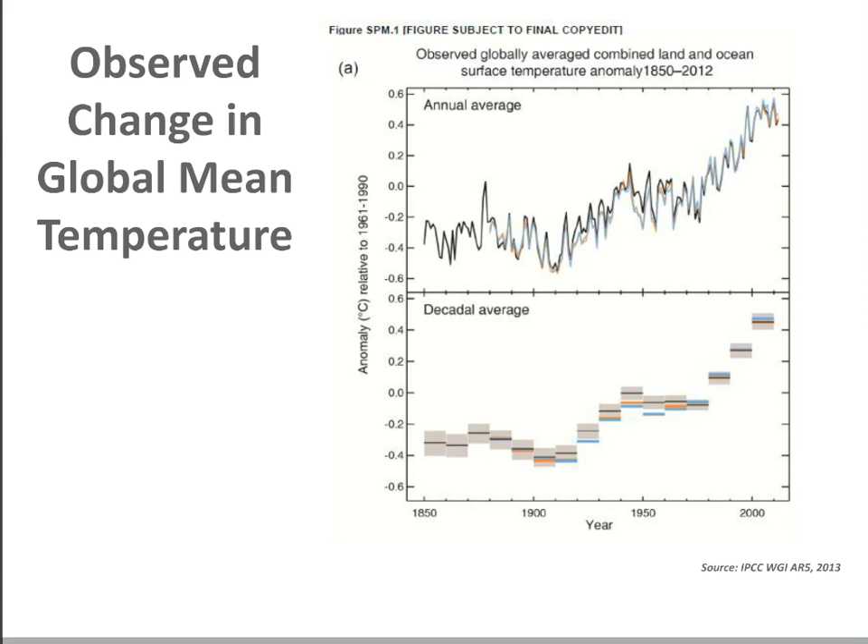You can see in this graph of observed change in global mean temperature from 1850 to about 2010, on the top half of that graph, average annual change in temperature has been rising steadily. And there's been a lot of talk from people saying, oh, the last 10 years have been flat, we're not seeing anything. You can still see that it's been increasing even if you look at those decadal averages.

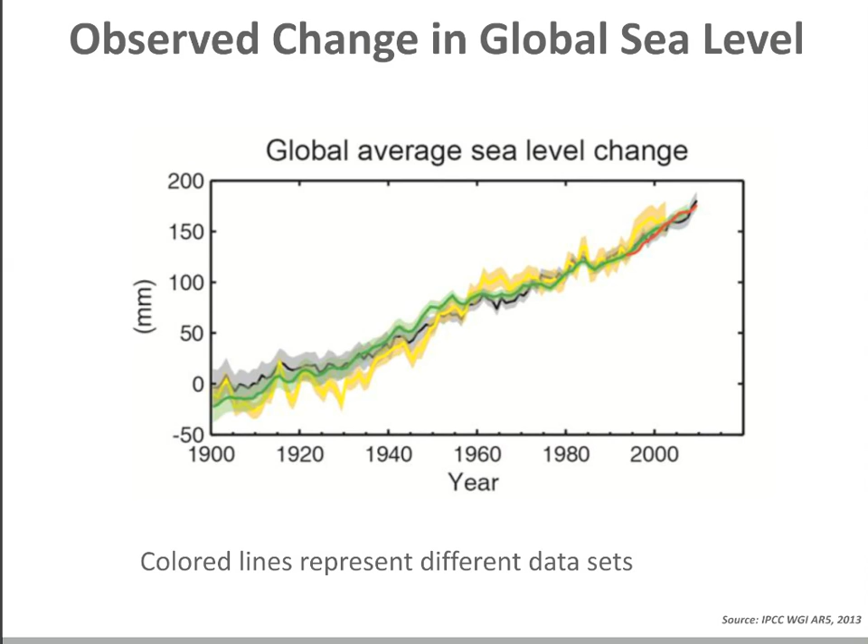If we move on to sea level rise, same thing. Multiple data sets are represented in different colors here. You can see from 1900 through 2010, a pretty steady increase in sea level rise. So, climate change really is happening. I believe it's anthropogenically caused. Most of the scientists in the world also believe that. But there's a lot less certainty in terms of what are the future projections. How is climate going to be changing? And there's a lot of uncertainty around this at many, many different levels.

There's uncertainty on the emissions scenarios. How much greenhouse gases are China and India going to be emitting, or are they going to go green? There's uncertainty in general circulation models. There are many scientific centers around the world that have put together climate change models, but they model the circulation differently. Temporal scale, whether you're looking at the very near term versus 50 years out, 100 years out, there's a lot of uncertainty in that. The variable examined: there's quite a bit of certainty in terms of how much sea level is going to be going up, but much less when it comes to precipitation.

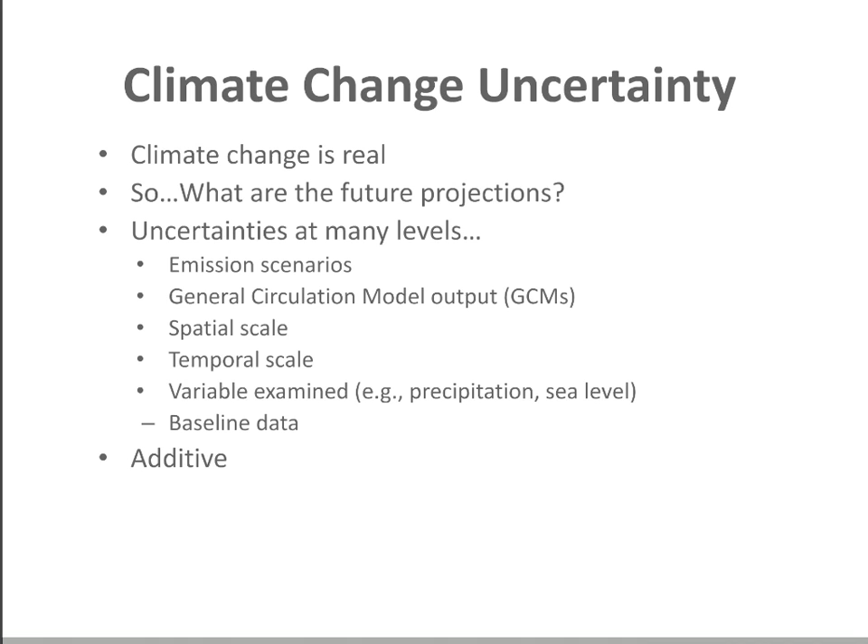And then as Chuck is going to talk about later, in baseline data, there's a lot of variability, whether you're taking averages over an area, whether you're looking at a site-specific location, that type of thing. And I should mention that all these are additive. So these uncertainties build on each other. So in terms of spatial scale, there's a range of projections at every spatial scale. On the global scale, the uncertainty really comes from the emission scenario, whether China is going to be exploding or not.

And in addition to that, how much the temperature goes up when you double the CO2 or other greenhouse gases. And then at the regional, local, and site-specific scales, you also get a lot of variability just because these global models don't really take into account a lot of the local processes, the topography, or in a local setting, which side of a lake you're on, or in a site-specific, maybe there's a urban heat island effect. So each scale has its own set of uncertainties, and this increases with the higher the resolution. And I've kind of gone over those last 2 points there.

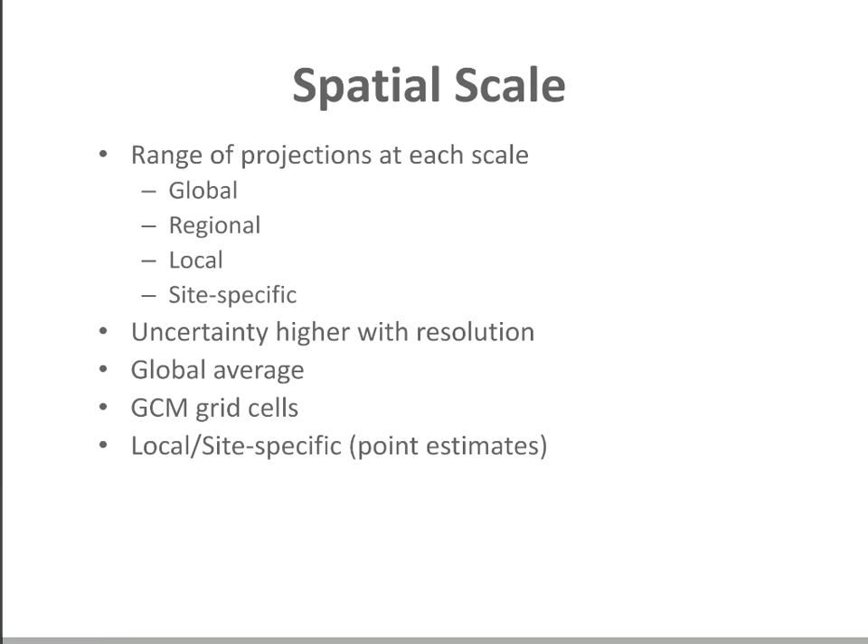The climate variables examined. So as I mentioned, there's a lot more certainty in terms of temperature than there is in precipitation. But also in terms of the type of event. Are you looking at long-term averages, or are you looking at extreme events? This kind of goes at, well, what's important in terms of building? Are you interested in looking at the average annual changes in maximum, minimum, or mean temperatures, or are you more interested in looking at that 24-hour maximum event?

Also, the length of the event. Maybe it's something like the number of days above 95 degrees Fahrenheit that you're interested in, or the average number of days without precipitation. So these length of events are also important. And also the recurrence of a threshold event. So maybe it's really that 100 or 500 year flood or heat event that you're interested in, and you're curious to see, well, how is that going to be changing in the future?

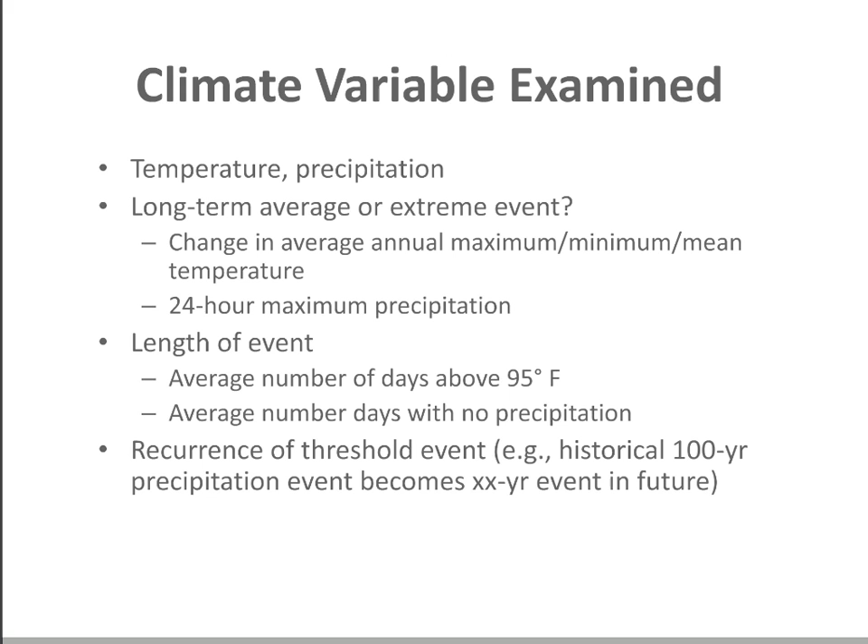So how we handle climate change uncertainty, you really need to answer questions that are pertinent to the need that you have. What is it that makes a difference in terms of buildings? What are the variables that are important? Is it that threshold event, or is it the long-term averages? And what kinds of risks are you willing to live with? Are you willing to say, well, most of the time we're going to see climate change in this way, but we're not really all that concerned about those outliers? Or maybe it's, no, it's really those big events. Living here in Boulder, we had the big floods this year. That was a watershed event that we were very concerned about.

What is the time frame that's important to you? Is it, you're looking 1 year out, 10 years out, 20 years out, 100 years out? Need to keep that in mind. And then, how important is the site-specific location? Are you interested in designing buildings for one specific location, or are you more interested in the regional area? So that's one way to kind of get a grasp on the uncertainty.

Another way here is to pick GCMs that do a better job historically in your area. So some climate models will do well in, say, one part of the country, but not well in another part. So you can kind of hone in on getting a possibly better estimate looking historically at how that model has done in your area. But you do have to keep in mind that just because a model did well historically doesn't necessarily mean that it will project the future equally as well.

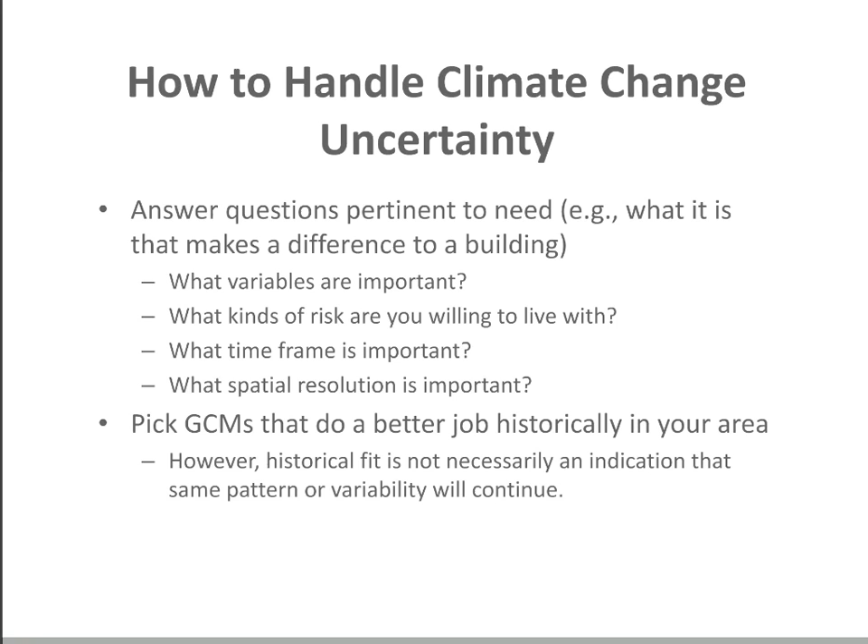Another way to handle uncertainty is to examine the range of climate outputs and to bound your estimates. So in this case, maybe you pick a high emissions scenario with a really hot, dry model, and you look at that one. You also pick another one that's a cool, wet scenario, and maybe a middle of the road scenario, so that you try to bound what is the range of uncertainty that I'm going to be looking at. And that allows you to know the potential range of the outcomes.

Another common technique that people use is to take averages across a variety of models. And these seem to do quite well in terms of hindcast in projecting past climate. But a couple issues. One, as I mentioned, it's not necessarily an indication of what's going to happen in the future. But the other problem is that when you take these averages, it may dampen those tails. So you may not get those extreme events, which could be important to you. And then a third approach is to examine the number of models in agreement. So maybe you're not so interested in those extremes, but you want to say, well, what do the majority of the models say, or what do 2/3 of the models say?

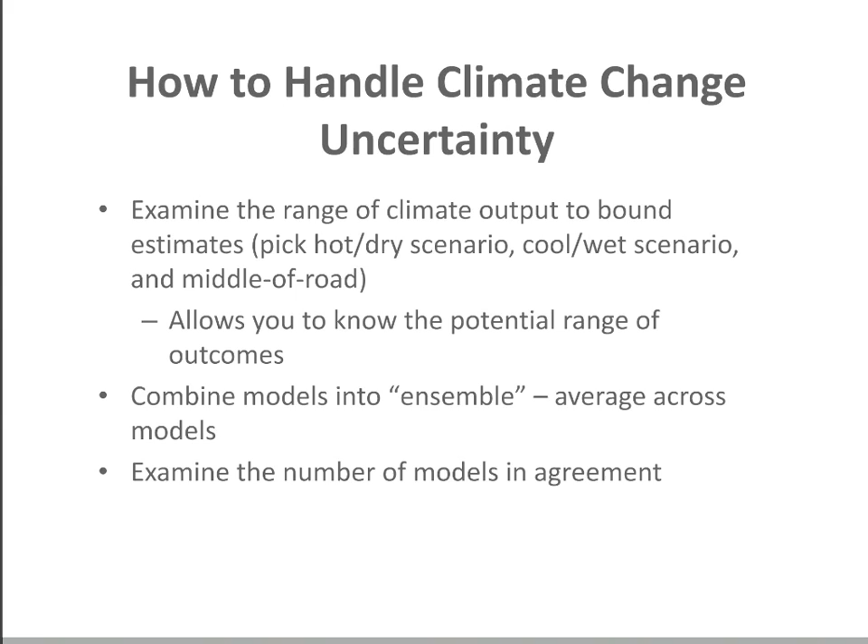So in conclusion, as I mentioned, there's a ton of uncertainty in terms of climate modeling, from emissions, model output, spatial scales, and temporal scales. But really what you need to do is simplify for the variables that are important to you over what time period, and really the level of risk that you're willing to take. And that will help you figure out the types of analysis that you want to do to show you those ranges. And there's a variety of websites out there and applications to help you do this type of analysis. They will put together ensembles or individual model scenarios at different emission scenarios. So I encourage everyone to check those out.

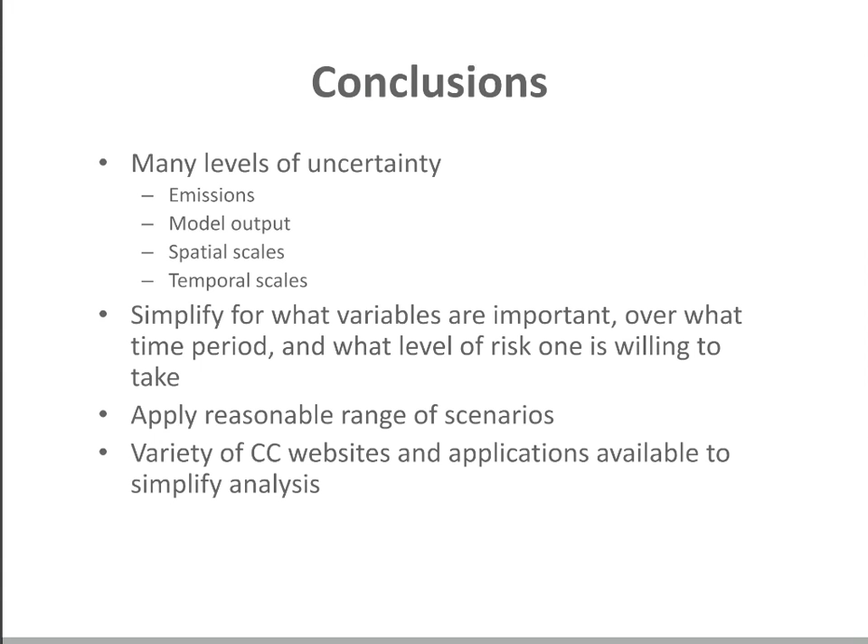We're with a private company, although we do a lot of our own research, and we're focusing on a number of things. But in the case here, the problem that Russ outlined was that while global climate models can add an awful lot of value, the more you want to assess the impact on a particular site, the higher the resolution, the more difficult it is to use the output of these models.

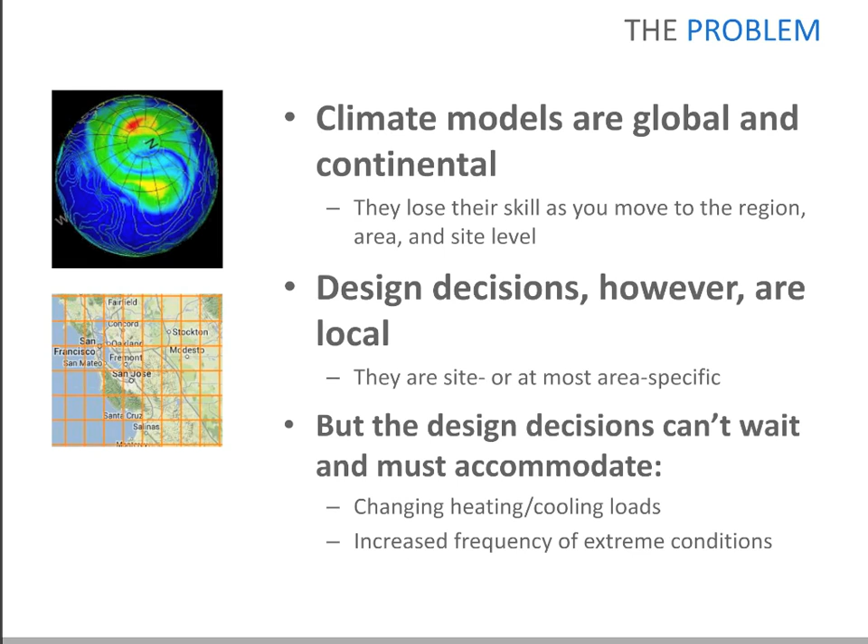The trouble is, of course, that design decisions almost always are local. They are site or small area specific. And while the climate is changing, you actually can't wait on making decisions. You have to find the best way possible to make decisions on how you're going to handle or even estimate what the heating and cooling loads are going to be in the future, and in some cases, even more important, what about the increased frequency and severity of extreme weather events?

What we've been working on since 2009 is essentially digitizing the entire global atmosphere back now 34 years. We've pulled in the best that we could find of all the satellite remote sensed data, all the observed data from the ground stations, plus the model sources that output gridded historical data and gridded forecast data.

We have over 580 variables, full coverage from about 4 meters below the surface of the Earth to the top of the stratosphere, and we've mapped those into 650,000 geostable grid areas, and then spent the effort to clean, rationalize, filter, and stabilize everything so that all the variables are consistent, and so that it is a statistically stable database representing every hour from early 1979 through 7 days ahead for each one of these grid squares.

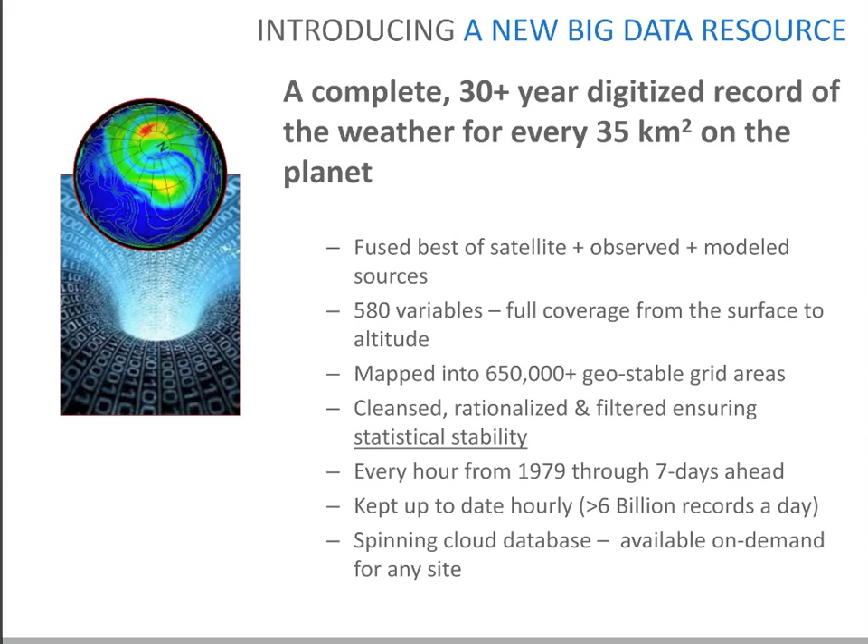Then we keep it up to date. Every hour we pull in all the ground station observations, and every 6 hours all the new modeled output from NOAA. And we've got it all spinning in a cloud database. It is basically designed to take the randomness, the errors, and the sort of esoteric strangeness out of weather data, so you can start putting it into analytic engines and help make some decisions that are useful.

We have built some offerings right now that can help with getting a handle on the impact of the changing climate. If you have your own ability to do analysis, you can get 34 years of gap-free data anywhere in the world. It's consistent place to place, so if you do an analysis in one part of the world, it will be statistically valid in another. And we have that data not only every hour, but also daily averages, mins, max, sums. We even have daytime, nighttime, month, year data to support analyses.

We have built for the energy modeling community on-demand TMY files that are always up to date through the end of the last year. And we've given the options to do them for 30, 15, 10, or the last 7 years. And we're working with a couple of companies to analyze the difference of looking at the typical weather for the last 7 years against the typical weather for the last 30 years and finding some non-insignificant changes. So we're trying to provide those options.

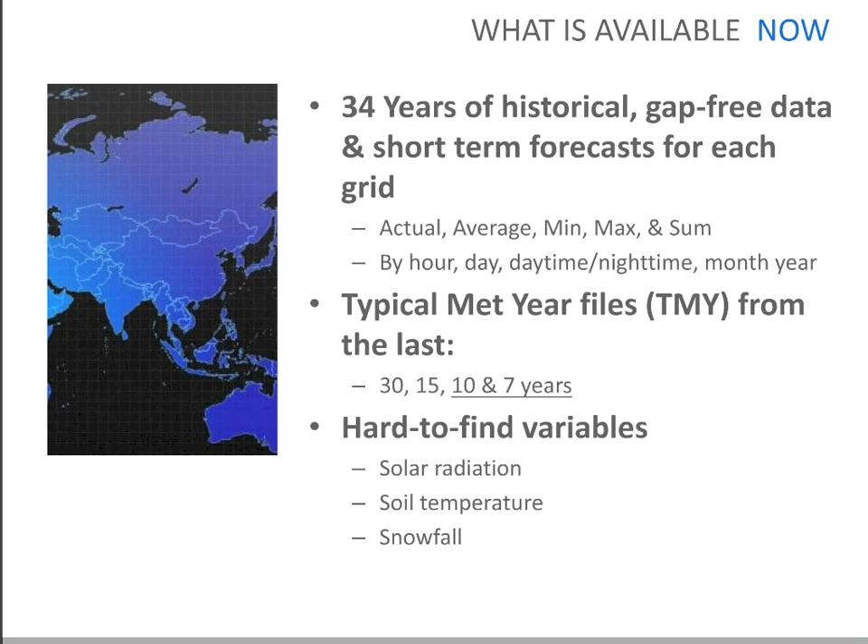We also have the hard-to-find variables: solar radiation, soil moisture, soil temperature, snowfall, ice, freezing rain, and the like. Solar radiation is an important one; instead of having it be estimated from cloud cover, we have the actual solar radiation. What's more interesting is the stuff that we're working on.

Because we build TMY files on demand, we are altering the algorithms that produce them so that we will soon have what we call extreme meteorological year files. In other words, over the last 7 or 10 or 15 years, what were the coldest set of months on record, or the warmest set of months on record for that location, or the wettest, for example.

We have an algorithm for urban areas for converting the typical meteorological year to urban, and as we work down a few points on this slide, as we are working on looking at trending for any variable over the last 34 years, we have the basis for providing future meteorological year files, which would be applying the trends within limits, and then taking the temperature and humidity and the like out 10 or 20 years.

We are also downscaling. The grid system we have right now is 35 by 35 kilometers. Eventually it'll be the entire landmass, but right now we're starting with the U.S. and working on severe events so that you have the data down to 1 kilometer, which is particularly important for measuring the frequency and intensity of severe events.

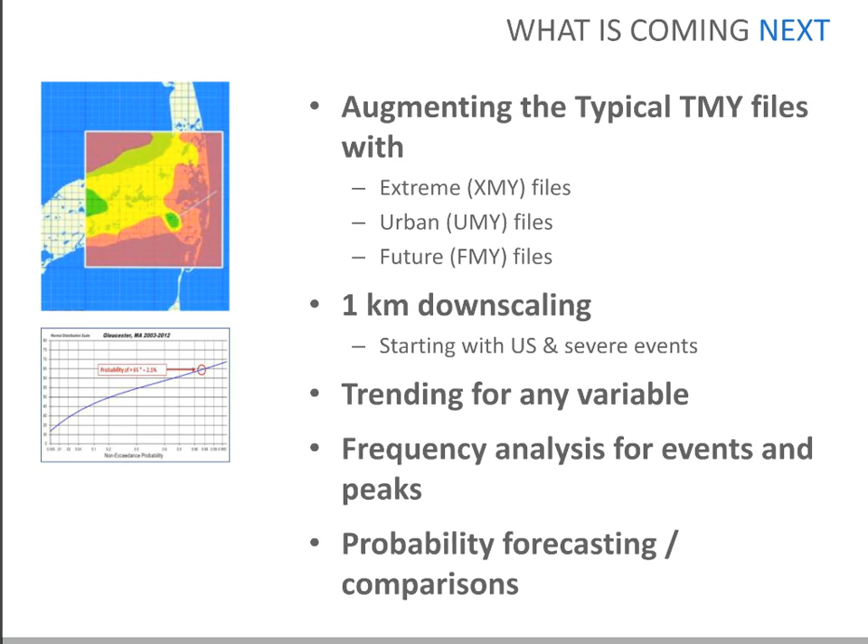That said, what we're trying to do is come up with an additional set of tools to augment the global climate models and other catastrophic models that are out there now that are based on modeling the atmosphere, with kind of a bottom-up approach that says you also should look at what are the exact trends at a particular location, and use both pieces of data in order to make your decision.

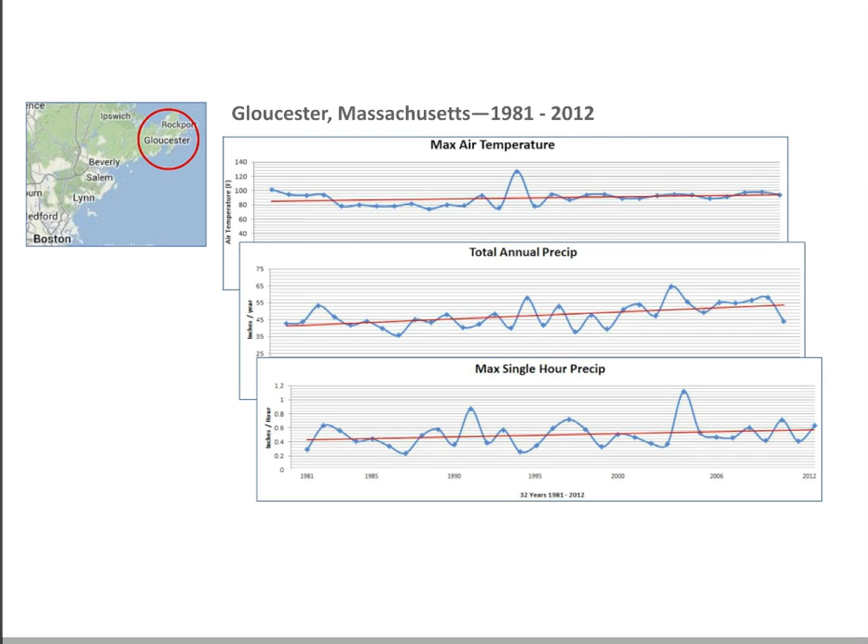These are just a few examples. I just picked Gloucester, Massachusetts to show over the last 30 years that the air temperature is getting slightly warmer there, but the precipitation rate is actually increasing at a higher rate, including the maximum single-hour precipitation. I think the next slide is just the frequency. This one's even more interesting.

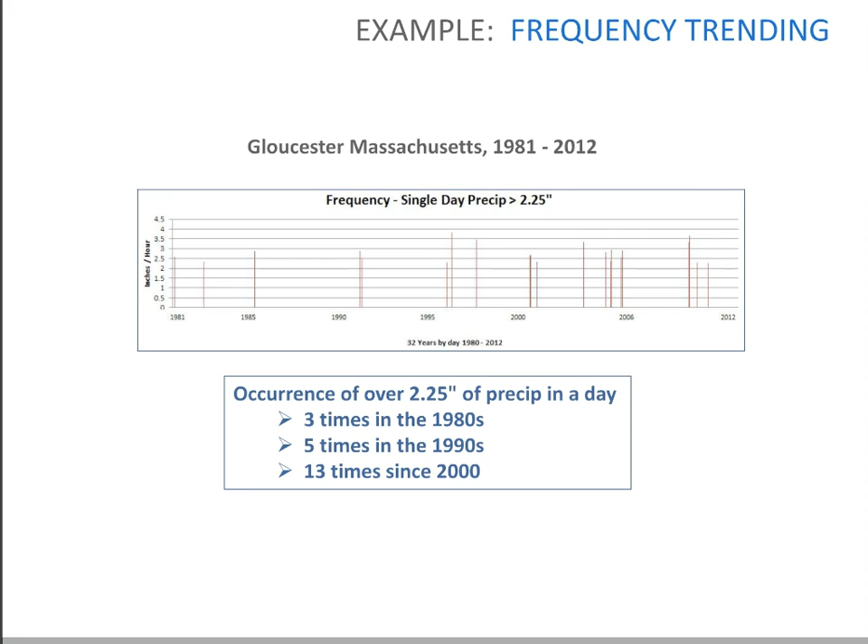If you look at the frequency of rain events in Gloucester over 2.25 inches of precipitation in a given day, it only happened 3 times in the 80s. It happened 5 times in the 1990s. It happened 13 times since 2000, and that's the sort of thing that is coming out of our data.

And then finally, we're doing these decade by decade comparisons of what the probabilities are to aid the design decisions and the like. In this case, it's the same location. What's the probability of over 65 inches of annual rainfall? In the 80s, it was only 0.5%, and it's gone all the way up to 2.1% likelihood of that much rainfall in the decade starting with 2000.

So that's just the base set of tools that we're working on to try to leverage the data, and we're always looking for people to work with that want to leverage the data and make some tools that enable making conclusions out of it.

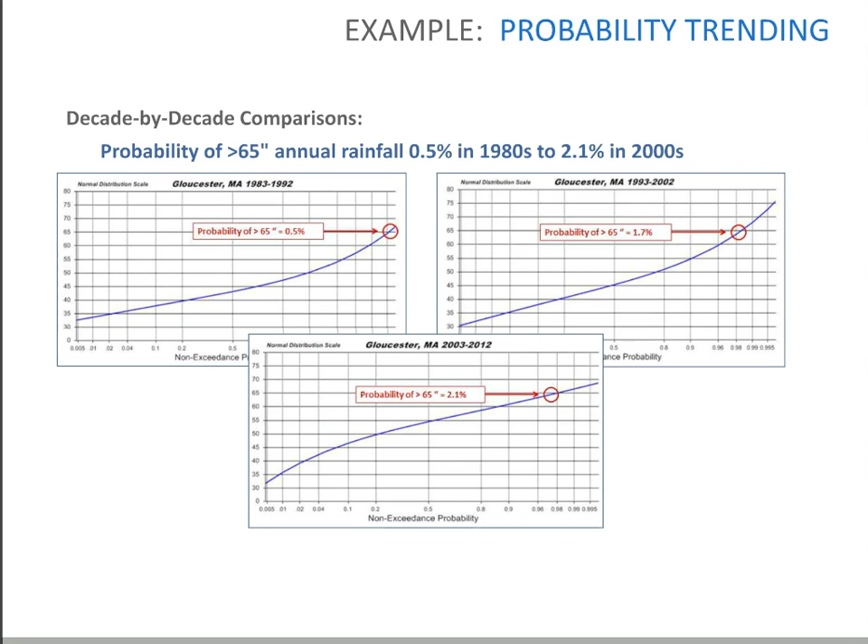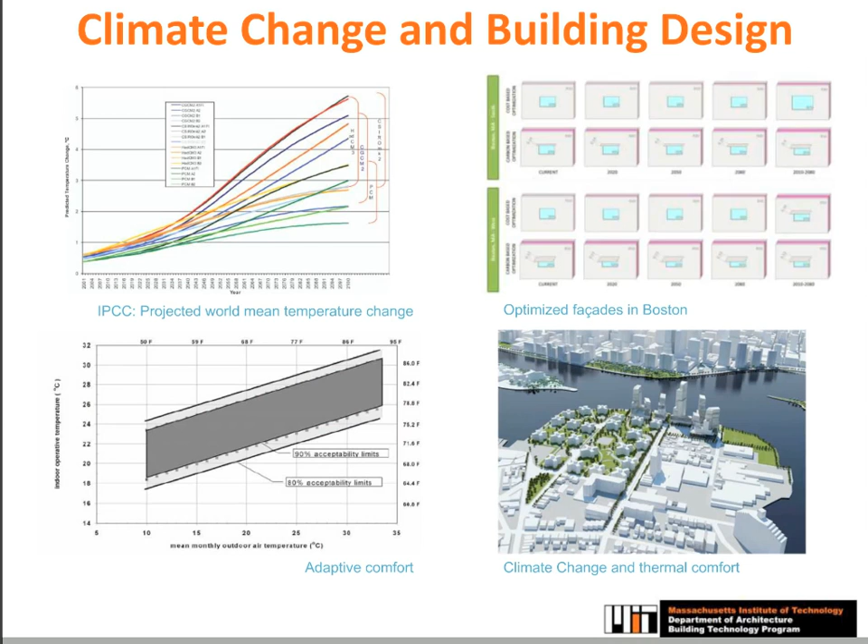So after Russ gave you a bit of a background of the different general circulation models that we are using to predict climate change, and Jacques talked about the different ways we are generating weather files, I am now going to talk about the application of these models in design. For that, I'm going to give you several examples of where we've worked with climate change data for building design at the Sustainable Design Lab at MIT.

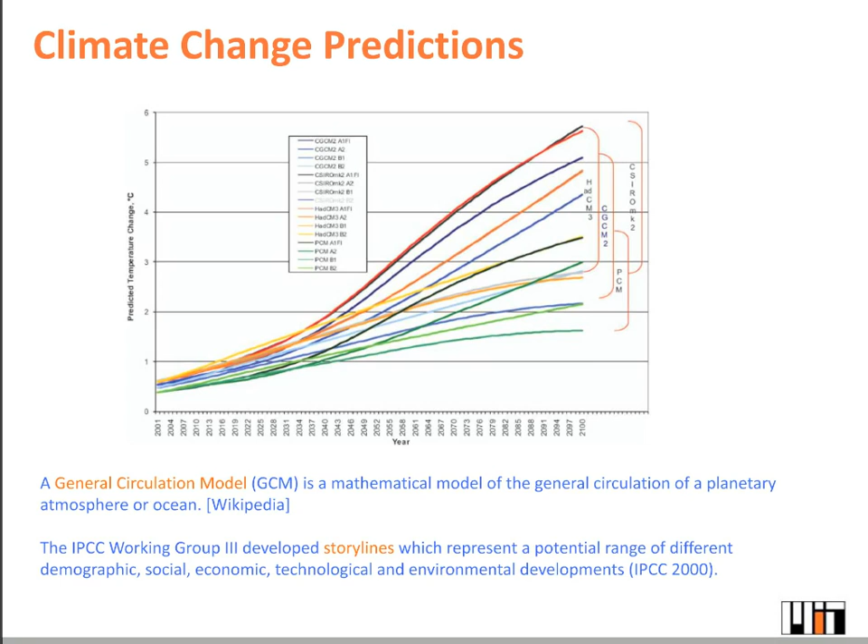Okay, so as I said, you've seen all these graphs before, general circulation models. These are different GCMs that are predicting how the global temperature is going to change over the next 80, 90 to 100 years. So now, how can we use these types of models for actual climate design? There is a method out there that is called morphing, and it was developed by Drury Crawley and others.

What it does, it uses your TMY or EPW file that you're using. So basically, we have methods out there that use the IPCC global circulation data and then combine it with a weather file that you're using for your site, and that helps you effectively to create a new climate file.

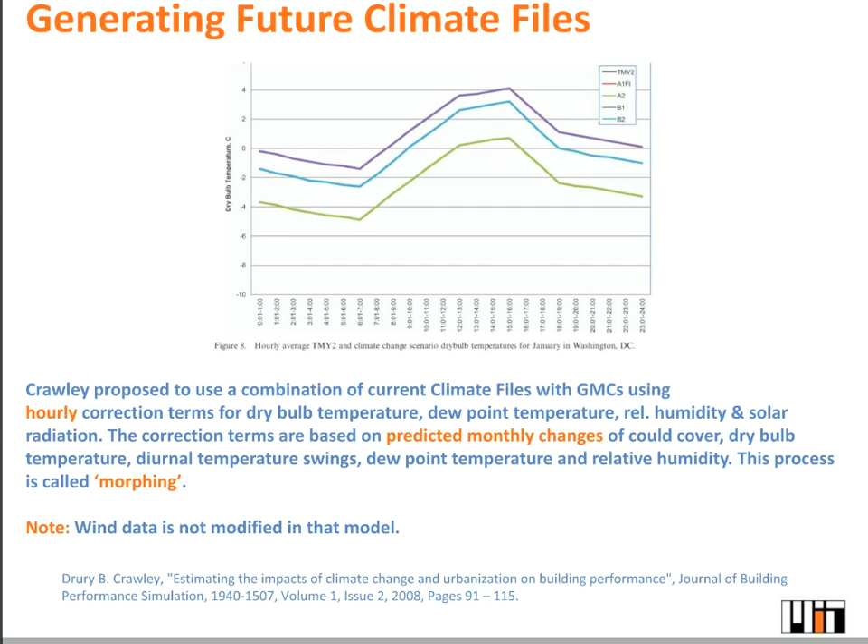So specifically, if you go to this website that you're seeing here, the Climate Change Weather File Generator from the University of Southampton, it's an Excel-based file, you see a screenshot of it here. You are basically able to load in an EPW file from whatever site you want to work in, and then you select for what future scenario you want to generate a climate file, and then you get a new TMY2 file.

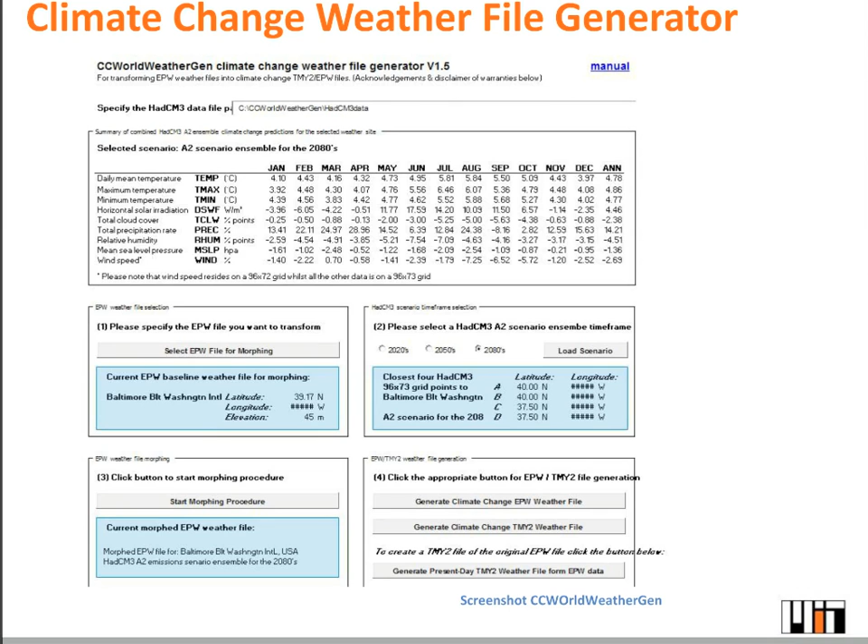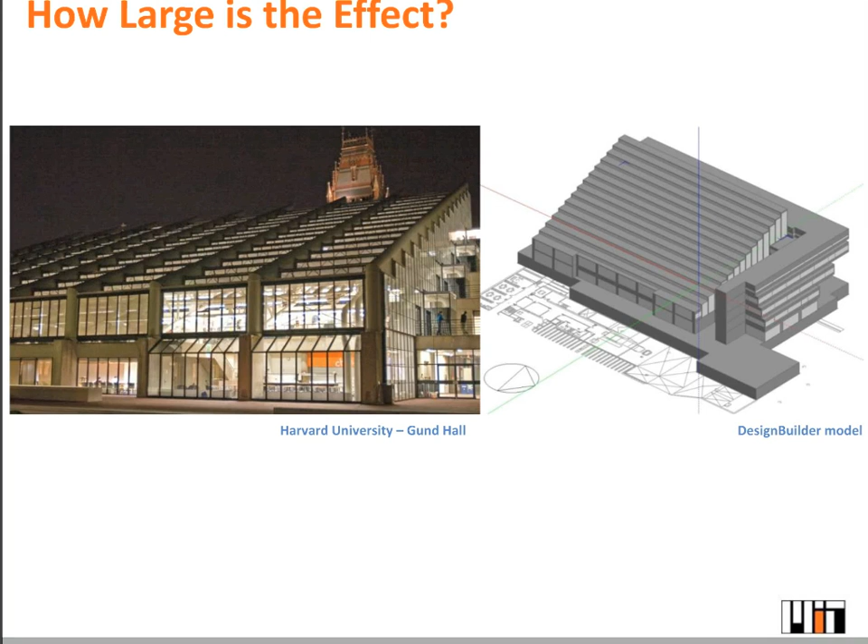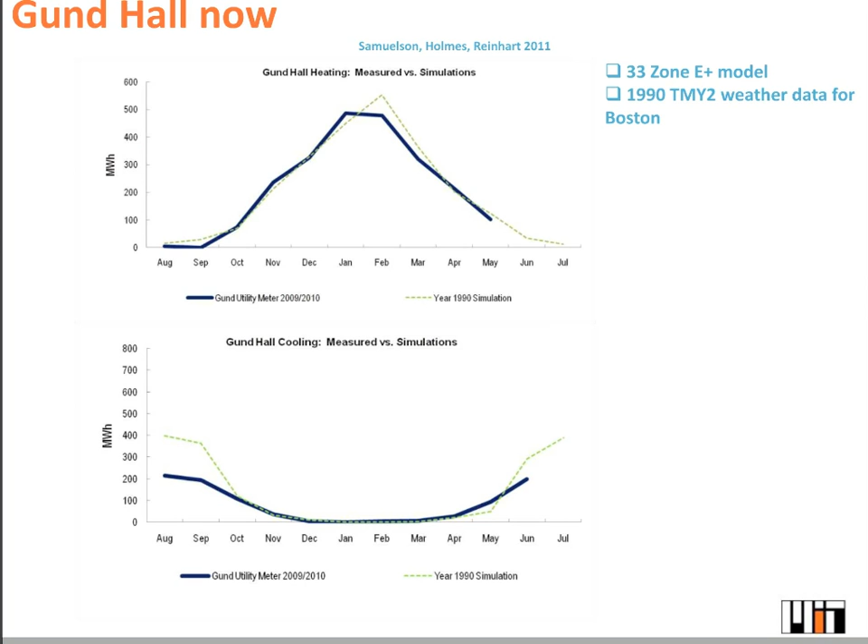And the main point is here, if we do that for 2009, 2010, we are getting very good agreement. So our model actually works. If we are now using the climate data for 2080 according to the IPCC A2 scenario, which is a middle of the line scenario, then actually the same building in Boston will use 36% less energy over the whole year for heating and 45% more energy for cooling. So it's a really dramatic effect.

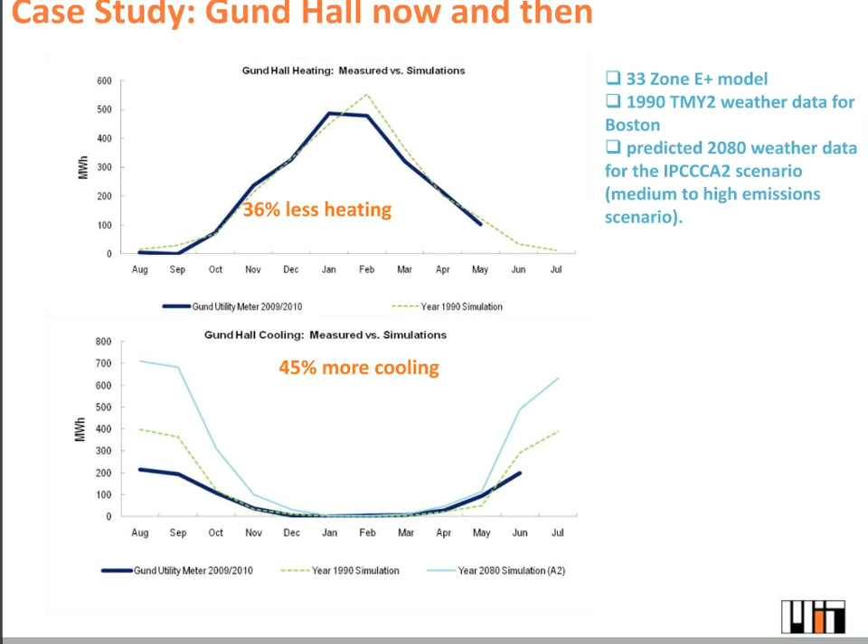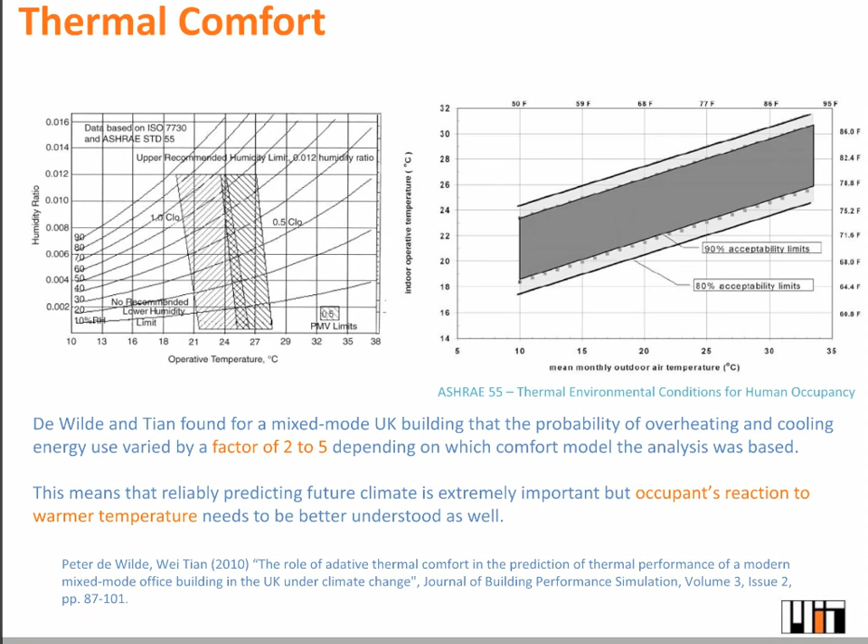And for those of you that are interested in doing sustainable building design, designing buildings for the future, it's obviously necessary that we start taking this into account as well. So once we looked at the effect of how big it can be, let's look at how we can apply it effectively. So one question that we looked at here was basically to see, well, if we are designing a building for comfort, for natural ventilation now, how comfortable is this building going to be according to the ASHRAE standard 55 in, let's say, 50 years or so?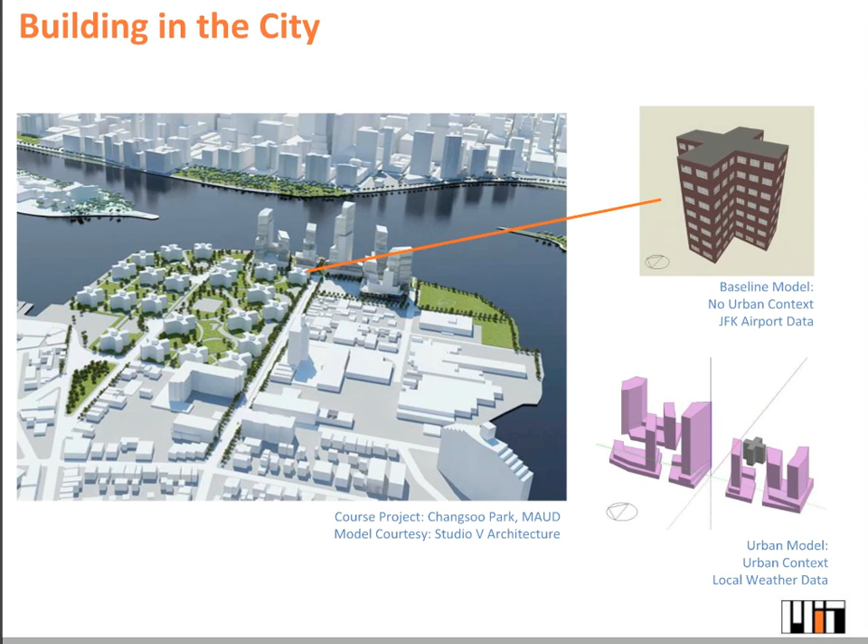And in order to use a case study, we worked with this project here located in New York, where a new complex, these high-rise buildings that you see here, were supposed to be designed next to a low-income housing facility close to JFK Airport. And the first thing, of course, you notice when you put up this massive new infrastructure here, is that these new buildings are going to block the sun for the existing buildings, and they're also going to block the wind.

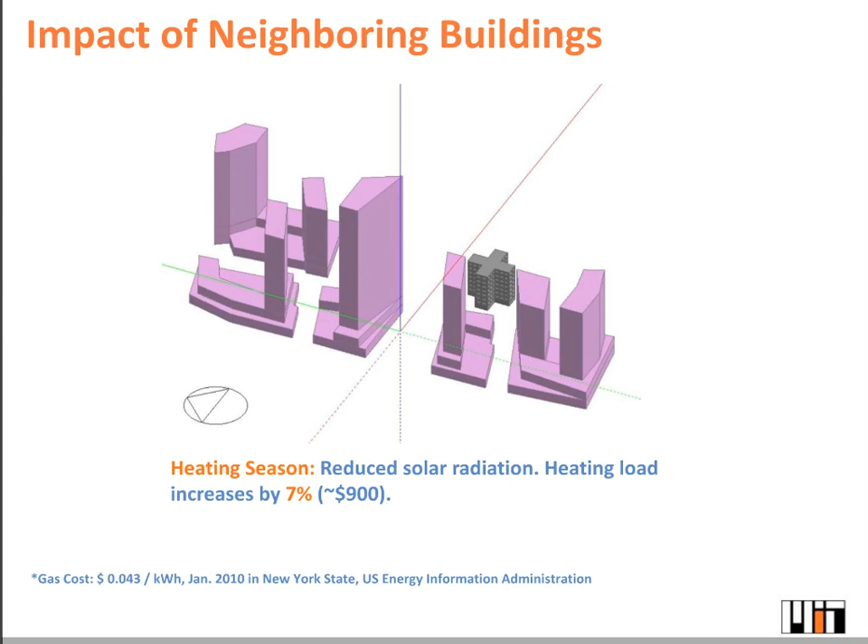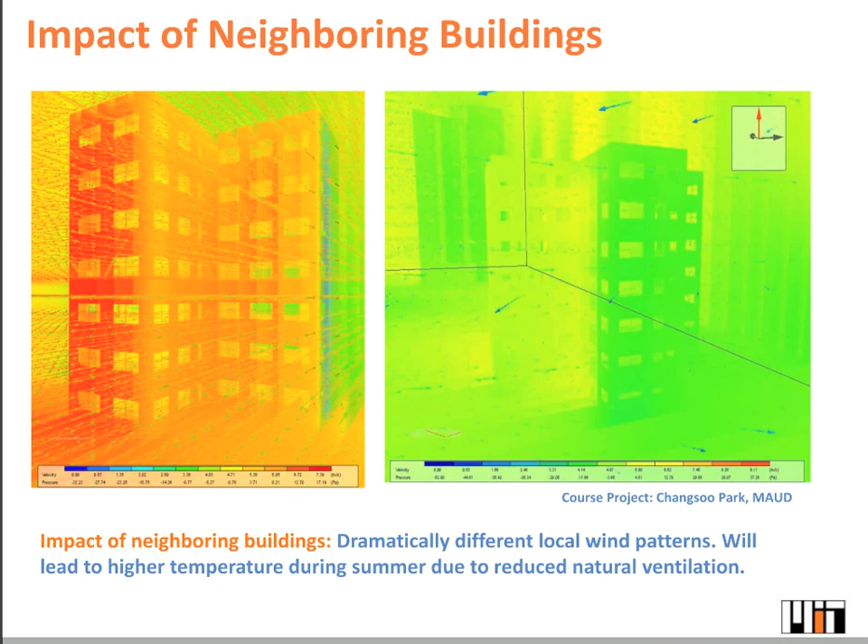And if you realize that right now most of these buildings don't have air conditioning, we can now look at what this actually means going forward. So this is what this graph effectively summarizes. What you see in blue is the temperature distribution within the place if we have air conditioning. And of course, it doesn't matter what climate we have. If we have reliably working window unit air conditioning in the system, we can get the hours of the year when the building overheats under control.

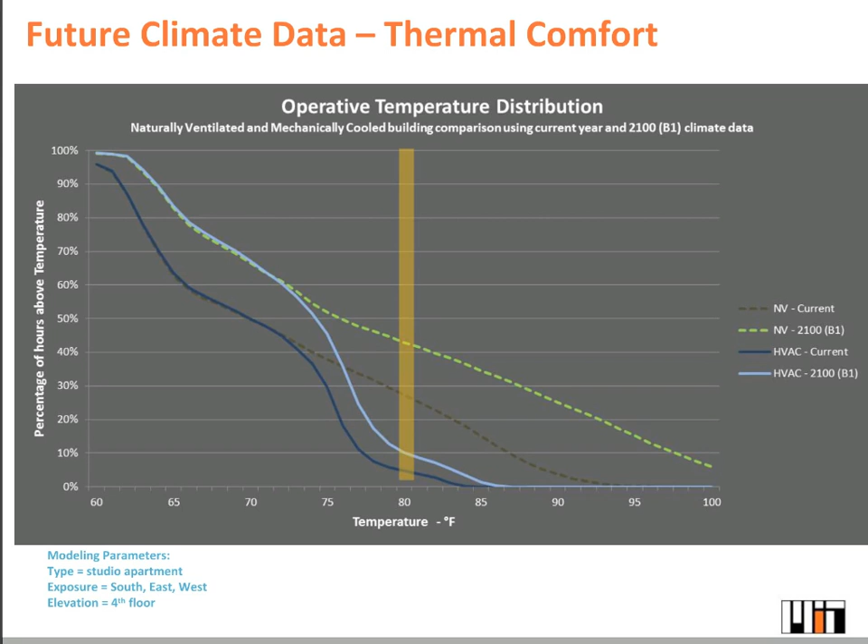What we also see in the current situation here, about 25% of the time when people are in the building right now, we will have overheating over 80 degrees Fahrenheit within that building. But if we now look at the future climate scenario, we actually see that this number greatly increases. So if we put these effects together, if we only had climate change and no change in behavior, then since the climate is getting warmer, the heating energy in the buildings will be reduced. But if they don't purchase any air conditioning in these units, the electricity use is going to stay the same, so we would save energy.

But actually, of course, since the building will be overheating so dramatically, there will be more air conditioning, so we actually overall need 25% more energy for the fuel costs. So this gives you a sense of how you could apply this type of future climate files for a thermal comfort study looking forward.

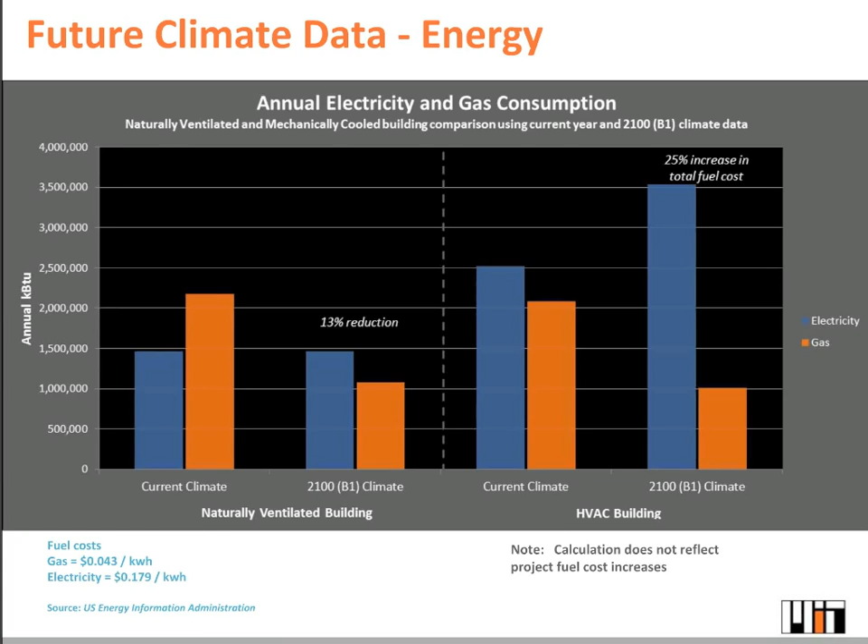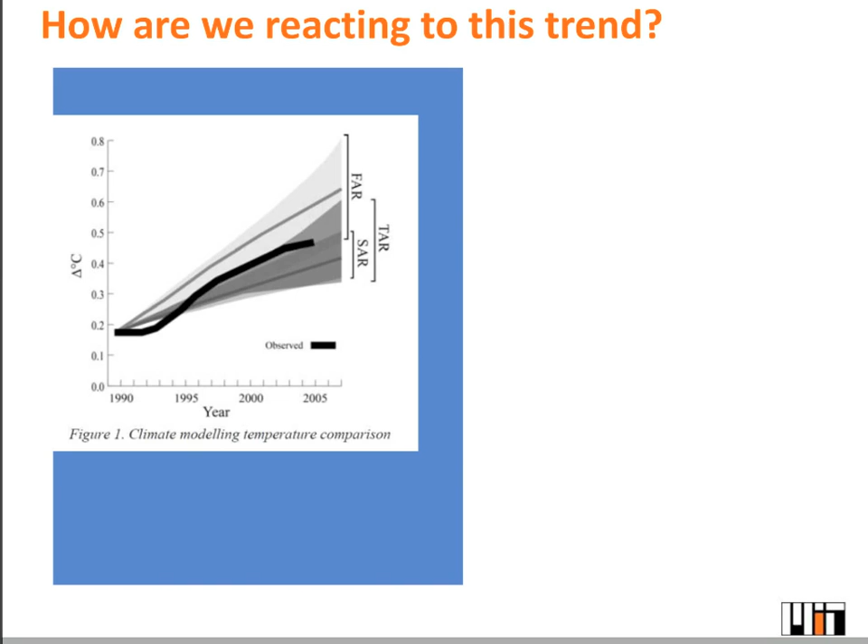Another example that I wanted to show is just a combination of climate change and money. So this is a study that we've done where we looked at not only different climate change scenarios and how far the climate is going to change, but also what the US government is predicting the retail prices for these different scenarios are going to be.

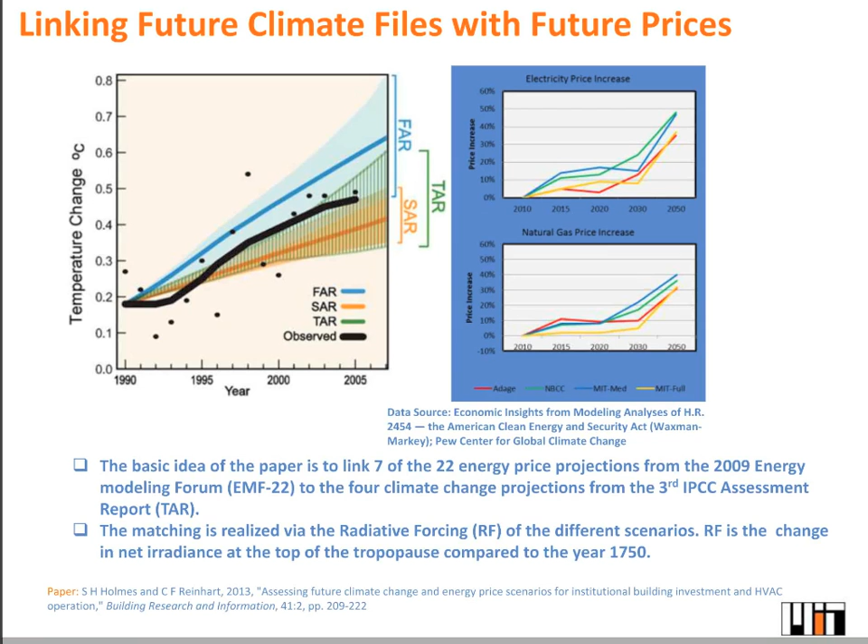This is a paper done by Seth Holmes and myself. What we are finding there, actually using these predictions of future energy prices, we can basically now tell you not only how much energy a building is going to use going into the future, but also how much it's going to cost you to maintain for energy use in these buildings.

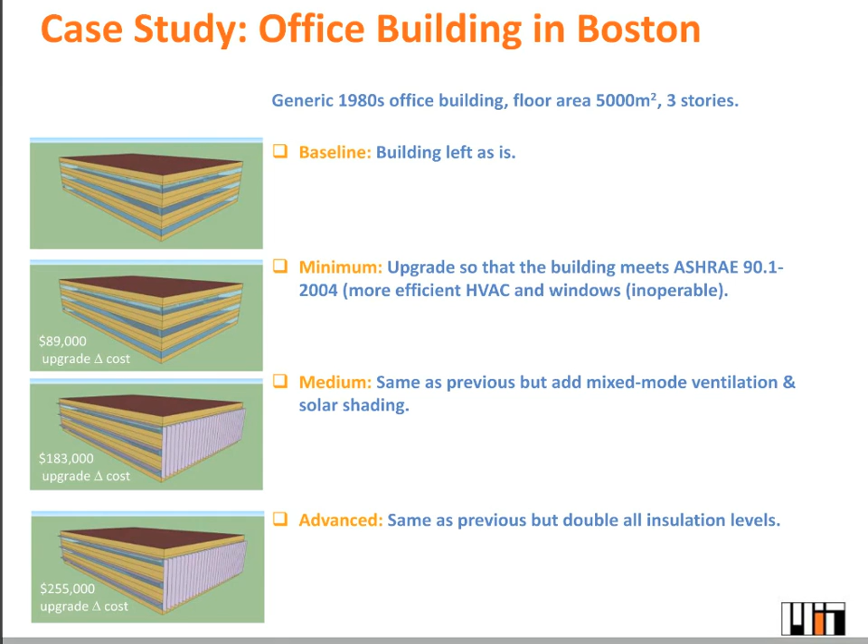So this is our little case study. Imagine you have a building located in Boston. In the top case, it's just a 1980s office building, and the baseline is the owner doesn't do anything. 5,000 square meter, we keep the building as it is. And now let's assume we're bringing it up to code. The cost would be about $90,000. If instead we go for a more aggressive scenario, adding mixed mode ventilation, solar shading, the costs obviously go up. So now we want to do analysis, how much is this going to cost us?

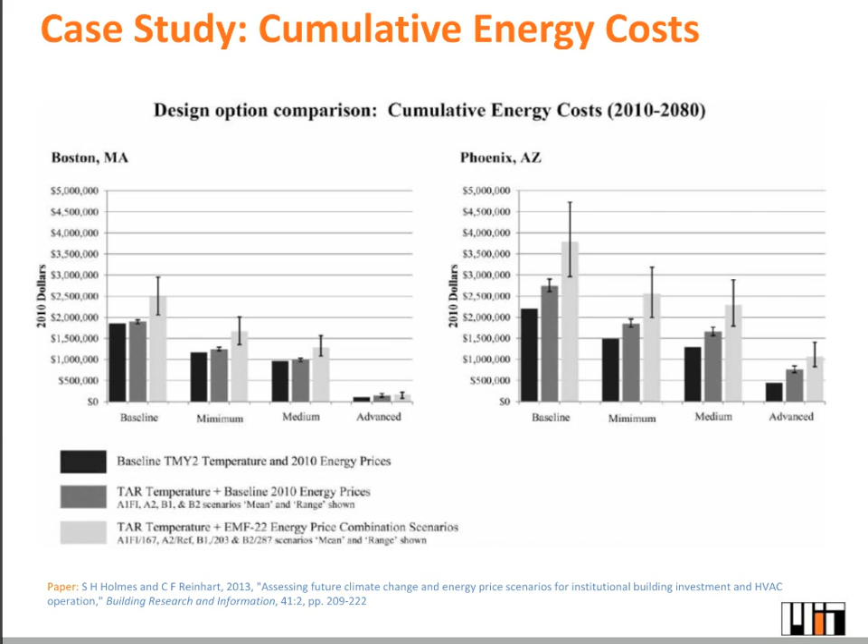If instead of in Boston, we're doing the same type of analysis for a building that's located in Phoenix, you see that the effect is a lot larger, because if the climate is getting warmer, in Phoenix we are only in the cooling mode, so the effect is just a lot bigger. So this effectively gives you a method that allows you to combine climate change with future energy prices, and that in turn allows you to justify the costs of building green.

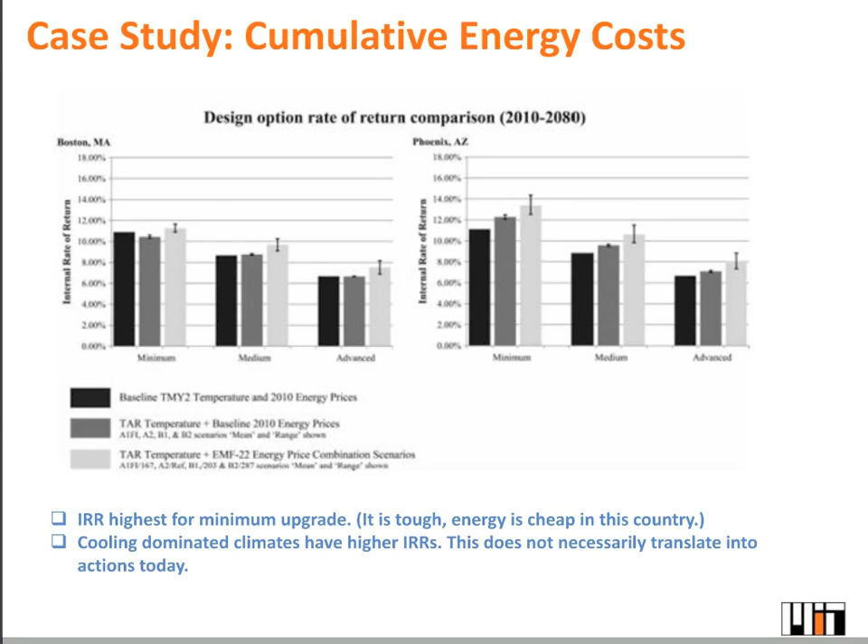And this is an analysis where instead of looking at the overall cost, we're looking at the payback time. So here you see for these different medium, minimum, and advanced upgrades what the internal rate of return is. So am I going to invest this money into a retrofit or not? And what you see is that unfortunately just bringing a building up to code actually has the biggest bang for your buck, and the reason for this is that energy prices, even the predicted ones, are just too low right now in our country. So this is a little study that I quickly wanted to touch upon.

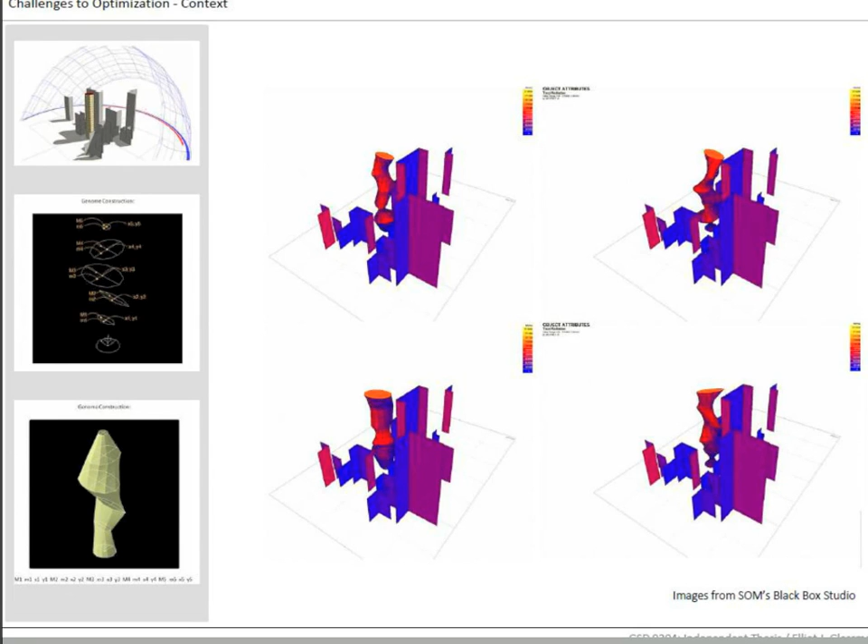So we wanted to take this analysis further and do the analysis for different climate scenarios. What we've done is a simulation study using a very simple space, and all we are changing are insulation levels in the walls, window to wall ratio, and the overhang depth.

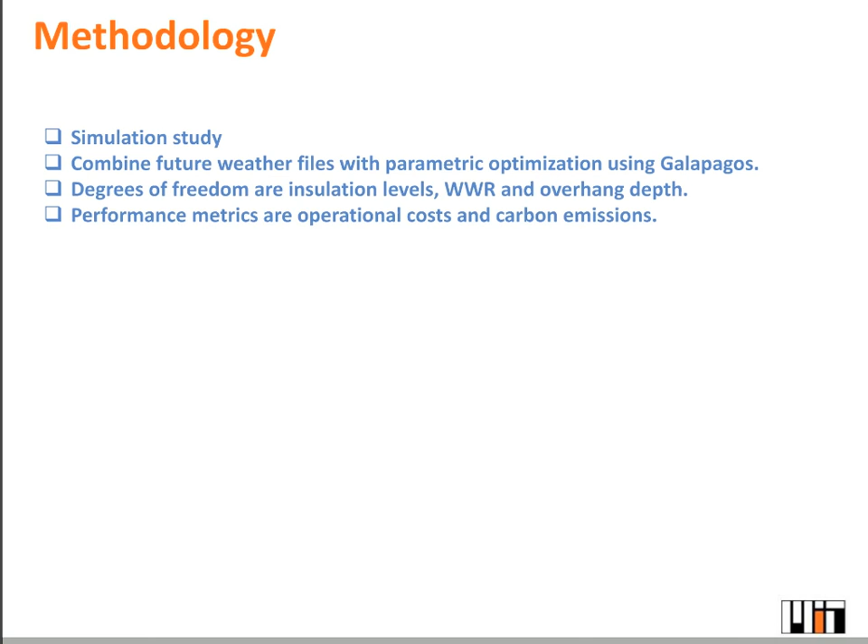And then we use an optimization algorithm to basically come up with what is the best facade for a different climate. So here in summary, we did this analysis for single spaces facing in the 4 cardinal directions in Boston, Fairbanks, and Phoenix. And we either said, let's do the analysis using our current climate, 2020, 2050, 2080, or over a long period. And of course, when you do this analysis, you have to make a choice.

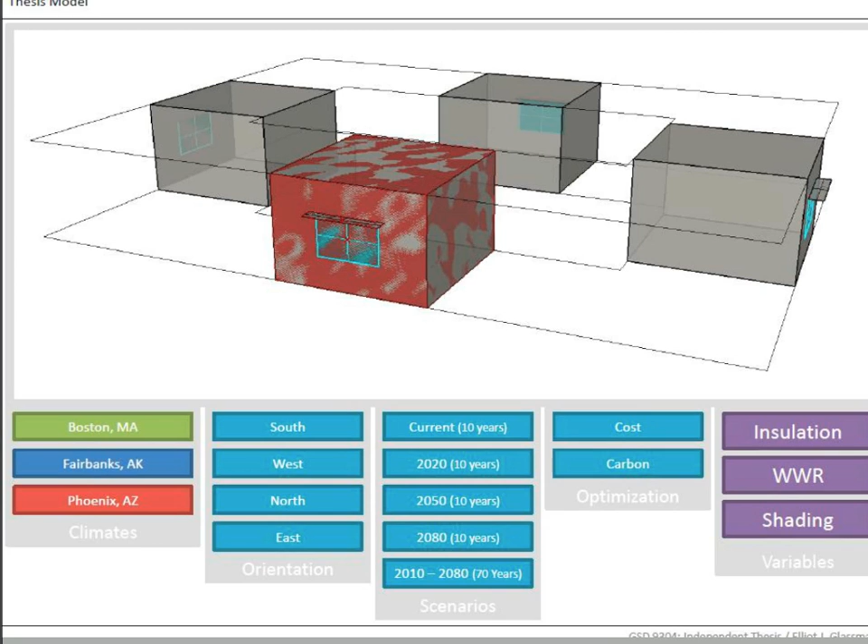Do I want to optimize my costs? So do I want to optimize over 10 years the energy costs for my building, or do I want to optimize carbon emissions? And when I'm optimizing carbon emissions, then I'm weighing cooling a lot more, so I get different solutions. And here you just get a snapshot of our results for a south-facing space in Boston, Massachusetts.

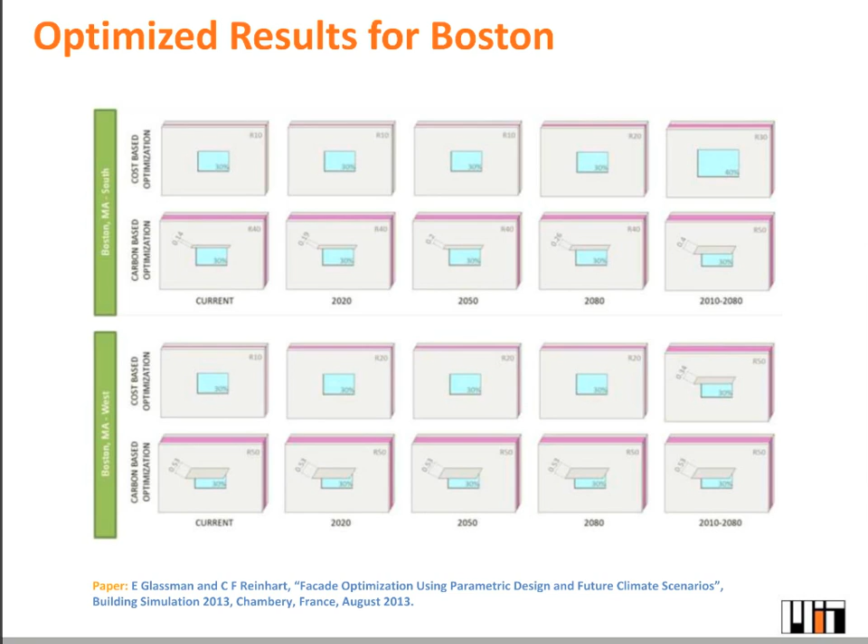And if I'm, instead of doing a cost optimization, doing a carbon analysis, you see you have an overhang that's slowly growing as it gets warmer and warmer. So the last point that I quickly wanted to bring across is just this notion: how do we basically optimize not only for embodied energy, not only for operational energy, but also for embodied energy over a long lifespan.

That's what I had for this presentation.